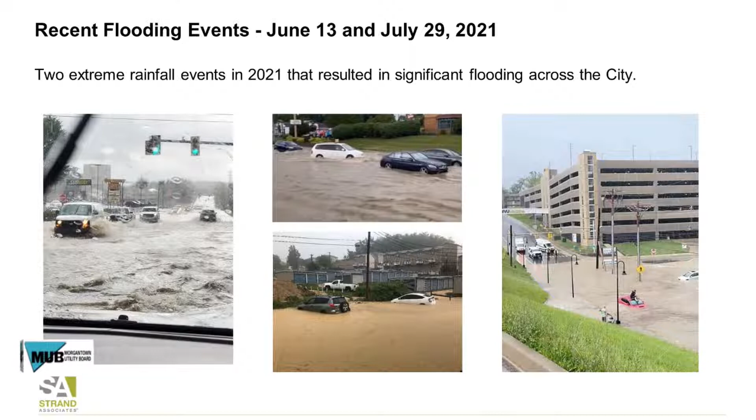So what we thought we would do is arrange our discussion tonight around 4 major steps. First is understanding the rainfall that fell in those 2 events, determine where the flooding occurred, understand the existing stormwater management system that is in place today, and then we wanted to review some of our initial observations of the flooding that occurred.

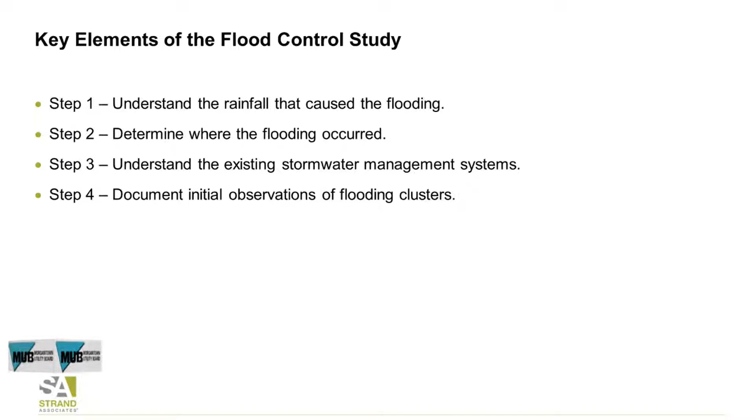And then what we do is we characterize the various rainfalls. So on the June 13th event, the rainfall varied from 0.77 inches to 3.3 inches over an hour. And 3.3 inches of rainfall in 1 hour is very intense rain. So the average for that June 13th event was about 1.9 inches. And we'll get into explaining what that means in a minute.

On to the July 29th event, the gauges ranged from 2.88 to 6.42. 6.42 is extremely intense, extremely unusual. So the average for that second event was 3.9 inches in 1 hour. So what does that mean?

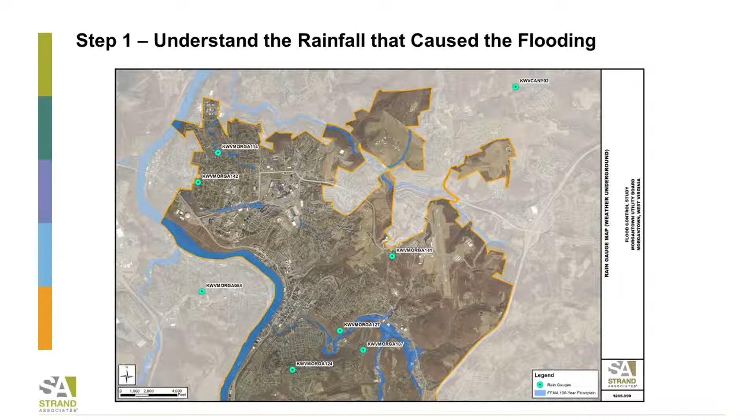And this is sometimes a difficult and challenging concept to convey to people, because as engineers we always use the term 100-year, 50-year, and in this particular case we would be telling you you had two 100-year events within about a month of each other, which doesn't make sense, right?

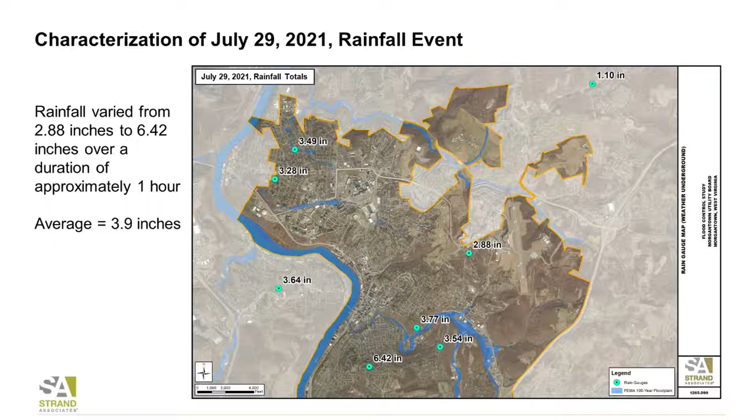So in reality what that means, we characterize rainfall events, we look at 50 years of historical data, as much data as we can find, and we just run statistics on it. And it's really an issue of probability. So the rainfall events that we characterize, when we say a 100-year event, we mean that there's a 1% probability in any given year that that storm can occur. A 50-year event means there's a 2% probability.

Well, with rainfall, this is what we see. We look at all the historical rain that Morgantown has received, and we basically have determined that about a 2.5-inch rainfall event, that's shown in that yellow bar on the graph, anything above that is greater than a 100-year event and has less than a 1% probability of occurring. Both of these events that we have been looking at exceeded that 100-year probability. So we are over in the right side of this spectrum with those two events. And you can see the red text below it.

Now, the other important element of this graphic is you can see this blue horizontal line is between the 10-year and the 25-year event. And that's in essence what the engineering standard for a level of service for storm sewer conveyance systems is, typically about a 10-year to a 25-year storm. Okay, so starting fresh in a community, you're going to put storm sewer systems in to convey runoff. A typical design standard in the United States is somewhere between a 10 and 25-year event. And again, it's kind of community specific, but that's in general terms.

So even with a well-designed storm sewer system that meets industry standards, when you get rain events like you experienced on those 2 dates, those systems are going to be overwhelmed.

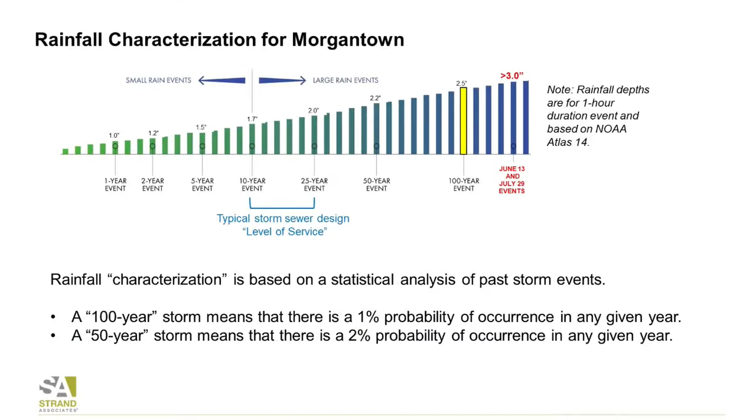The complaints were a little bit more widespread on the July event, but that really shouldn't be a surprise because the gauges showed higher intensity rainfalls in a number of gauges across the community. But again, in both of these events, we do see some gauges, even around the city, outside the city limits, that did show significant variability in the total rainfall that fell. So, the combined complaints, there were 239 documented flooding locations in both those events, 239. And you can see that a lot of them were clustered up in the northwestern portion.

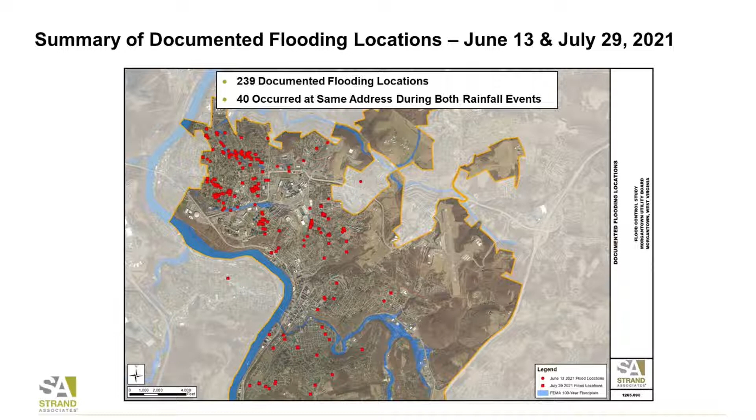So, the first question everyone asks is, why did this happen? What's the probability of it happening, et cetera? So I thought it would just be helpful. Chris and I do a lot of this as part of our jobs. We live and breathe stormwater. It excites us, probably bores you people, but one of the things that we have seen over the last decade is more widespread occurrences of flooding, more intense rainfalls.

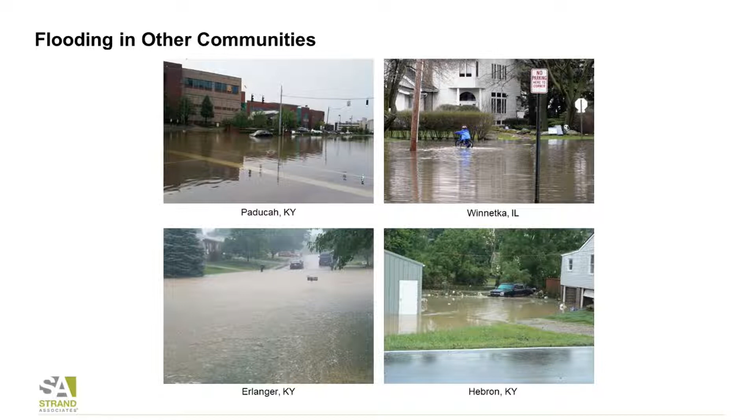And so here's just some examples from some of our clients: Paducah, Kentucky; Winnetka, Illinois; Erlanger, Kentucky, it's where I live; and Hebron, Kentucky. And again, in all of these cases, we were finding situations where these intense cells centered on a particular area of a community overwhelmed the storm sewer system and widespread flooding occurred. That situation in Paducah up on the top left, that's actually around their hospital. So access to the hospital was not available during a couple of these events, which obviously is a dangerous situation.

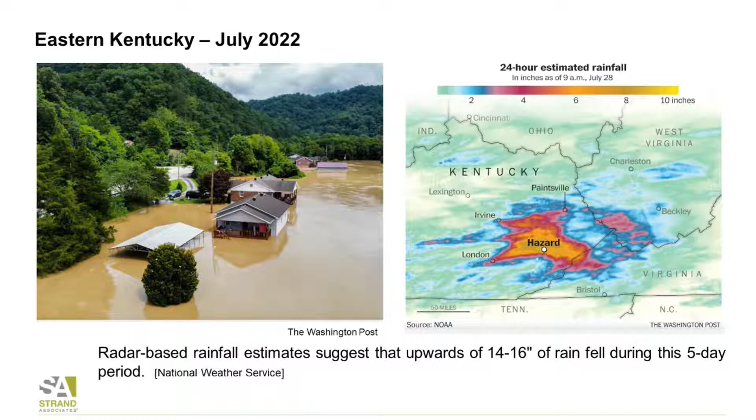Eastern Kentucky, I mean, I think everybody's probably aware of the events that occurred this past year in Eastern Kentucky. And again, I think sometimes it's helpful to put magnitudes in perspective. And you can see from this graphic that some areas got upwards of 14 to 16 inches of rainfall, which is difficult to really get your arms around in terms of that much rain falling on one area in a short period of time. And then this image on the right shows you some of the radar that shows you some of the peak intensities, and also, quite frankly, sort of how limited it is.

These cells seem to come into an area and kind of stall and sit and just dump rain, and bad things happen from there. So that's just a little bit of perspective from around the Midwest from some of our other clients that are experiencing similar situations with flooding. So as we step back and we look at where these complaints occurred, and we look at the type of rainfall that caused these issues, we begin to start trying to figure out, okay, why did this happen?

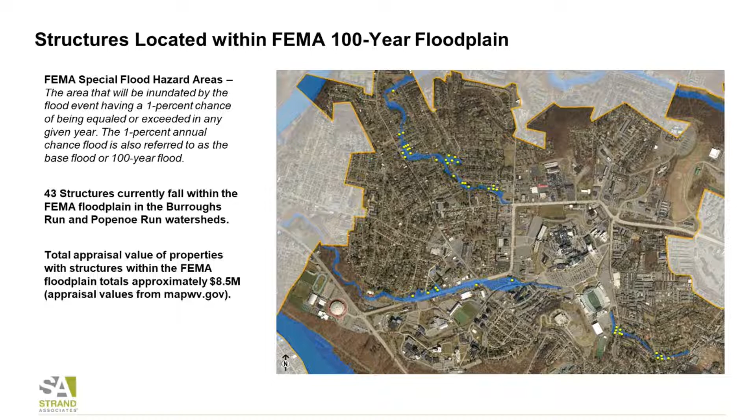So I'm going to turn so I can point. So all these yellow dots represent complaints from those storms from property owners along those floodplains. 43 structures. Just those structures alone, those 43 structures represent approximately $8.5 million in property value in the floodplain. So then we'll zero in a little closer. This is Burroughs Run. This is Popenoe Run. And then this is Popenoe Run upstream from the stadium. There's a culvert under there.

But again, it's important for everyone to recognize that, as stormwater engineers, when we look at floodplains and we look at a 100-year storm, we in essence expect to see those areas flood. So this is going to be one of the challenges moving forward when we begin to look at alternatives for your community, is what do we want to do in these certified floodplain areas? Now, the good news is it may open up some opportunities to bring some federal funding in, but it depends on what solutions are allowable under it.

Oftentimes, FEMA likes to do property purchases. They buy out the properties and remove them from the floodplain to stop recurring structure flooding. So these are some of the tools and some of the opportunities that are out there. But again, every community that is dealing with floodplain issues has to figure out the direction that they want to go.

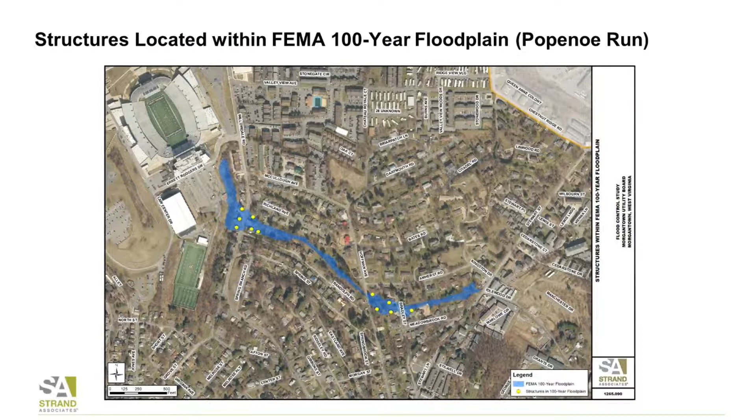So one of the exercises that I did in looking at these particular areas was, if you want to eliminate the water coming to the surface in a floodplain, you've got a couple of options. One is you provide extensive detention above it, so you stop the rain and the runoff from getting to those areas, which is pretty challenging to do depending on topography, et cetera. The other is you convey it. Because in essence, you saw on Patterson Drive, the water was running down Patterson Drive. That's moving through the floodplain. So the other way to deal with it is you convey it.

You convey it underground. And the way you would do that in some of these areas is with extremely large box conduit systems. Picture a big rectangular concrete box buried underground that's big enough to convey these rainfall amounts. So we just completed one of these up in Cincinnati, and so I used the costing values of that. We didn't size this, we just did some real high-level numbers, but I just wanted everyone to sort of understand, when you're looking at trying to solve some of the problems that you have here, what kind of dollars are we talking about? So this is really just to help everyone understand the magnitude of potential solutions.

This is very high level, it's very preliminary, but I used $3,000 a linear foot, because that's basically what the box in Cincinnati cost that I think is big enough to convey these events. So when you look at these values, you see in Burroughs Run, we would probably need about 6,000 linear feet. Popenoe would probably need about 4,000 linear feet.

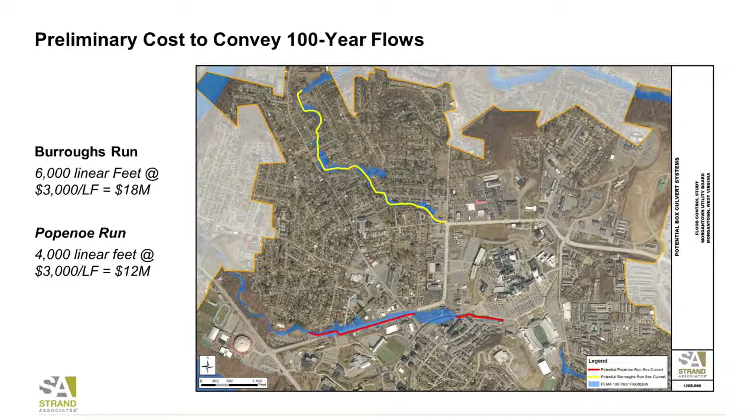So step 3 is understanding the system, and I'm going to turn it over to Chris to provide a little more detail on the next sections.

So any type of catch basin, curb inlet, culvert pipe, storm drain, or outfall — even the roadways themselves, once you get beyond that 10-year, 25-year event John was describing earlier, can sometimes be used for stormwater conveyance to get drainage down to the streams.

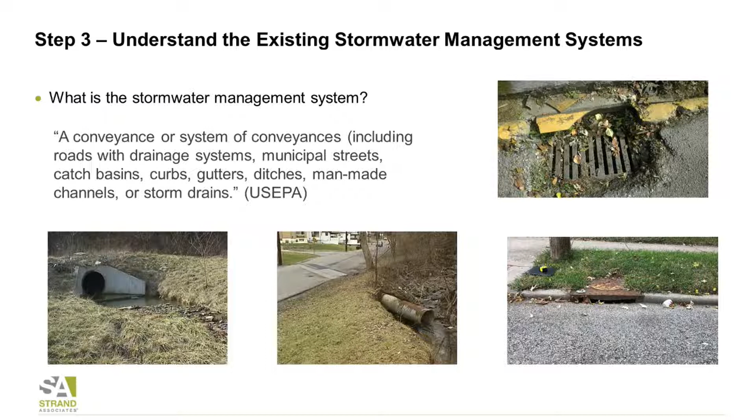This is a very broad, zoomed-out map, but as part of our flood control study we've been provided the stormwater mapping from MUB — all the stormwater conveyance systems, pipes, culverts, catch basins, and manholes — that we have to evaluate to understand, in the locations where flooding occurred, what the stormwater conveyance system looks like: how big it is, what the pipe size or diameter is, what material it's made of, and what the elevations are to drain areas of the city.

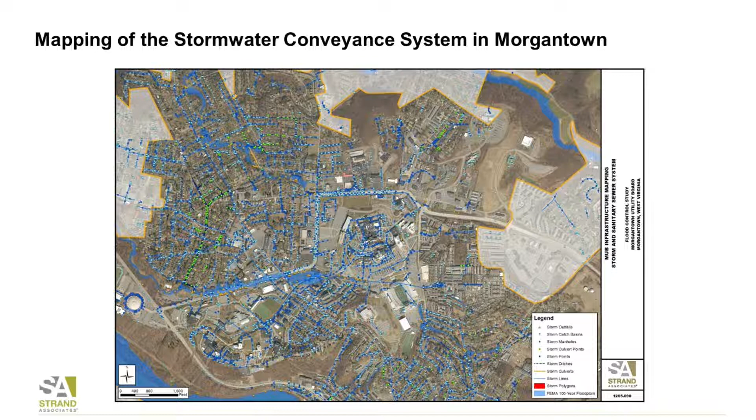So this is a pretty broad view, but we do have some statistics as we evaluate the existing system. Within the MUB stormwater service area, there are over 13,000 individual storm sewer segments conveying stormwater runoff during these rainfall events, equating to about 150 miles of storm sewers and culverts. We're talking about a significant amount of stormwater system throughout the service area, plus over 20 miles of open channels and ditches and approximately 6,000 individual storm structures — any catch basin, manhole, or outfall that's part of the system.

All told, the stormwater boundary that MUB is responsible for, from a stormwater management standpoint, is about 9,000 acres — a very broad area with a significant amount of stormwater conveyance systems helping convey runoff.

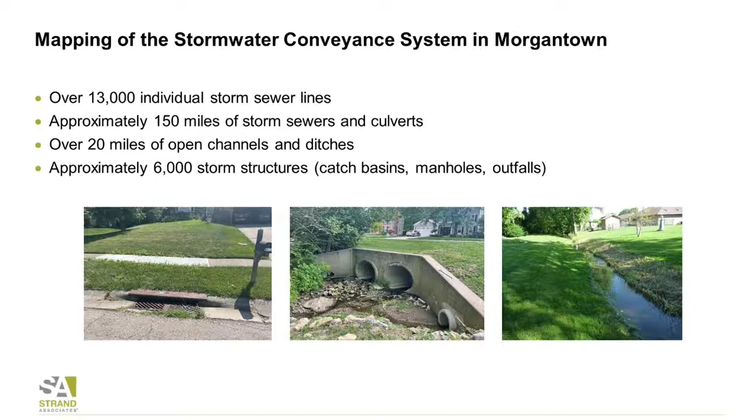One of the things we've started mapping, or reviewing, are existing stormwater detention basins and green infrastructure — stormwater control facilities that help manage runoff during rainfall events. A lot of these systems are around the university, which has implemented good programs for green infrastructure, a bit of a stormwater buzzword, but these features capture stormwater runoff, try to infiltrate as much as possible into the ground, and then slowly release it back into the stormwater conveyance system.

There are a variety of these systems within the Popenoe Run and Burroughs Run watersheds. Unfortunately, some of these systems became overwhelmed during those two events last summer. So they're good in practice, but they're designed to detain only a certain amount of drainage.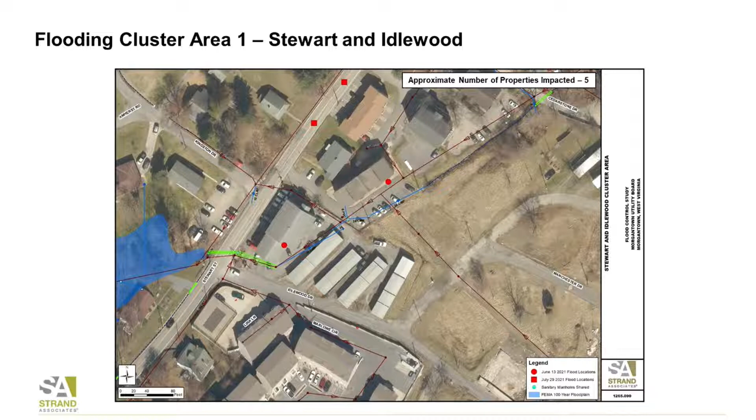During that event, from a scale standpoint it may be a little difficult to see, but we've got these red dots and red squares on the map that designate specific addresses or locations where MUB had documentation of flooding occurring during these particular events. So about 5 properties were impacted in this location.

Another complicating issue on this one: there was an active construction site upstream from this area. When you get a rainfall event beyond a 100-year event, even some of the measures taken on a construction site, like silt fence or sedimentation basins, can become overwhelmed, and that's why the flood waters in this location look pretty murky or dark — because of a lot of the runoff coming from an active construction site.

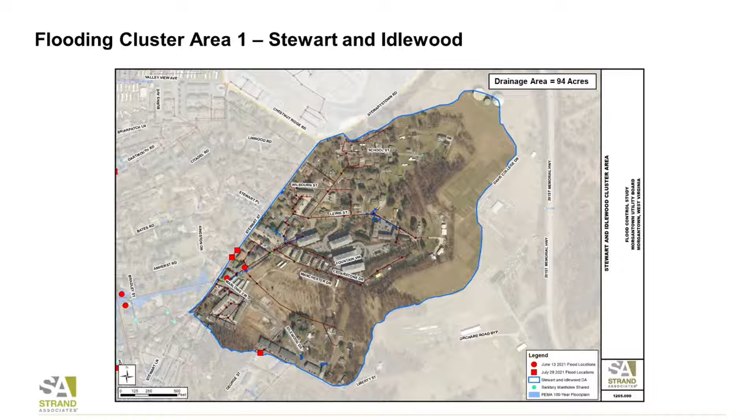Unfortunately, the existing infrastructure in this area, immediately upstream of where the flooding occurred, is pretty small. These images show the existing stormwater conveyance system, the piping network in this particular location. For example, you've got a 24-inch diameter pipe trying to convey runoff from about 90 acres of drainage. From an engineering standpoint, we have general rules of thumb, and this is one of those situations where, in order to convey runoff from 90 acres, you need something a lot larger than a 24-inch diameter pipe — it's just too small of a pipe to be able to convey that much runoff.

Now fortunately, MUB — as was mentioned earlier in the board session, the Popenoe Run stream restoration project — does include some improvements up to this zone to improve some of the conveyance capacity. But these are some of the limitations or issues we've identified initially here that we know we're seeing as a challenge moving forward.

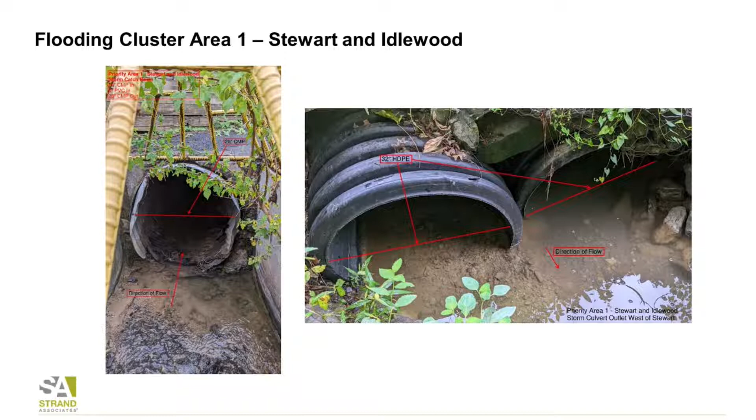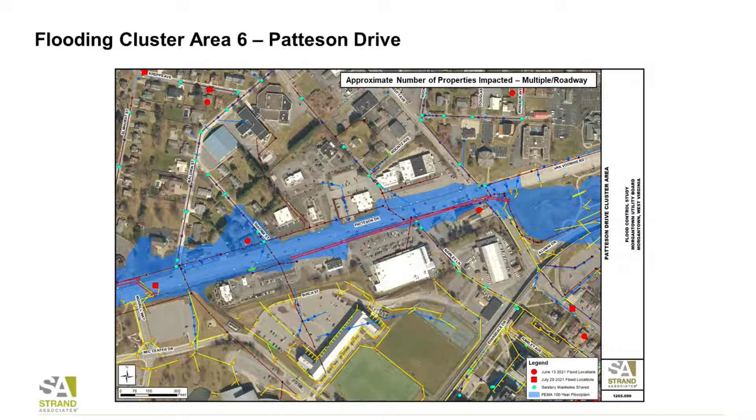So you're trying to get as much runoff into the culvert as possible, but you want it to be as free-flowing as possible. These are things we will identify in the flood control study as corrective issues from a maintenance standpoint to try to improve the capacity of the existing system.

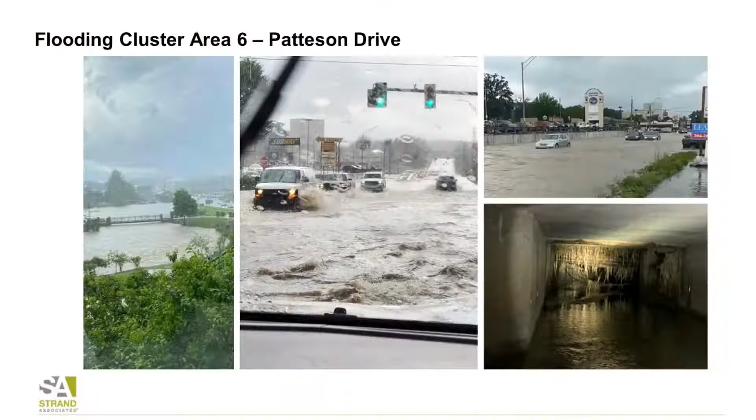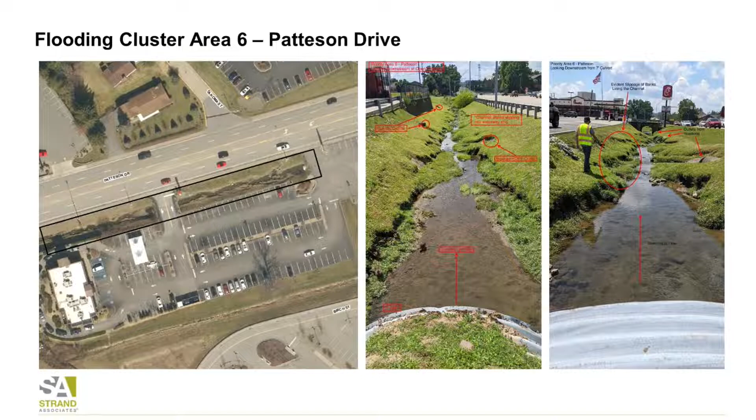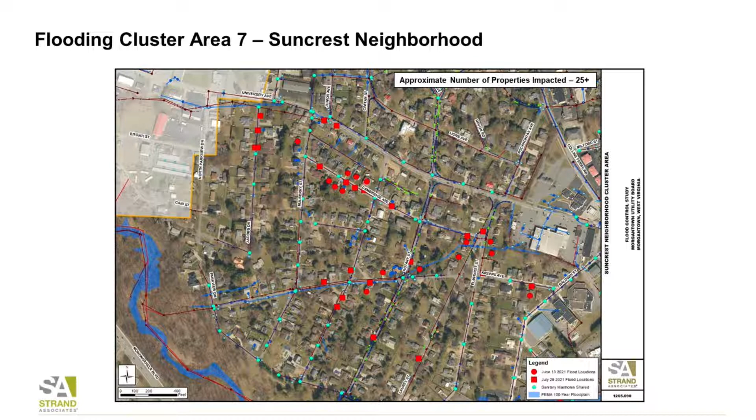Flooding cluster area 7 that we wanted to highlight too is the Suncrest neighborhood. For this particular neighborhood, there were over 25 individual properties or addresses that had some type of drainage issue or flooding issue during these two events from last year, so a pretty significant clustering of houses along some of these residential areas. Here are some pictures of backyard flooding and drainage issues that occurred during those events.

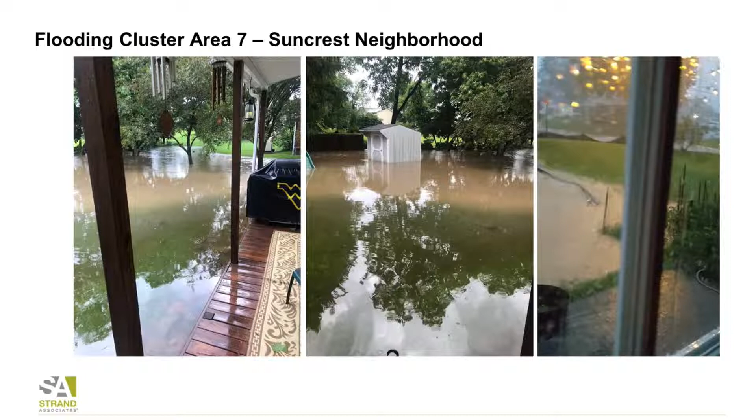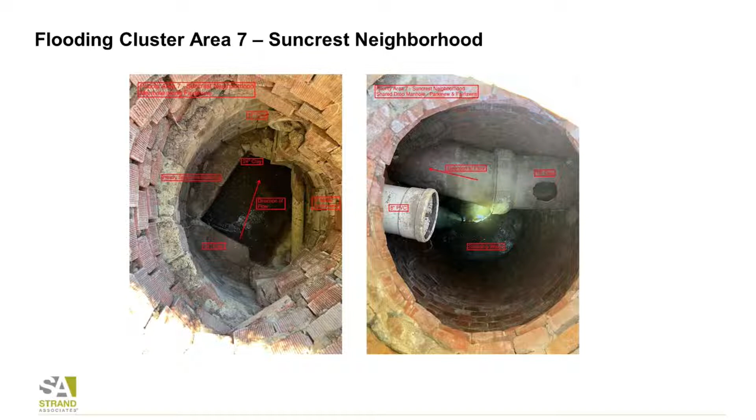So our initial conclusions within the flooding cluster areas: there is potentially undersized stormwater conveyance infrastructure. You've got large drainage areas or watersheds coming into the stormwater conveyance system that may be undersized to convey these larger design storms, along with storm inlets that have limited capacity.

I did show that one picture there where some of the pavement overlays have impacted some of the existing inlets, so it will be important just to reestablish the inlet capacities themselves. There is a very complex system between the storm and sanitary sewers in some of these neighborhoods, where it's not necessarily just a storm sewer issue. It is a little bit of a combination of a storm sewer and sanitary that are kind of acting in

tandem. Maintenance needs of the stormwater conveyance system, again, some of those partial blockages through box culverts or open channel systems that could use a little bit of maintenance to reestablish some conveyance capacity. And then really an overall lack of detention or stormwater storage upstream of the flooding clusters.

There are a lot of developments that have happened over the years prior to there being stormwater regulations in place, where now we've got a lot of impervious surfaces, rooftops, streets, driveways that are just kind of free-flowing into the local stream network without being detained.

And some of that's just a remnant of older development prior to there being stormwater management regulations in place. Now that there are stormwater management regulations in place, any sort of new development or redevelopment project is required to put in detention basins to manage the stormwater runoff from new impervious surfaces.

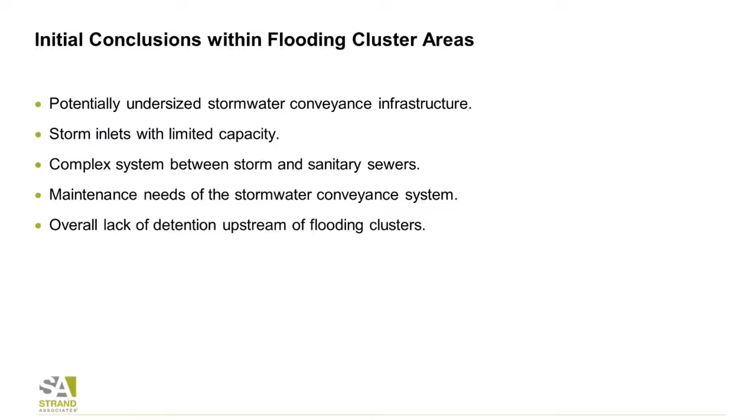So there are activities that MUB has completed following the rainfall events from last year that we did want to highlight. MUB has completed some strategic maintenance improvements throughout Burroughs Run and Popenoe Run. MUB has completed the removal of some of the restrictions within the box culverts. That big box conduit underneath Patteson Drive, some of the conduit has recently been removed from inside the box culvert itself to try to reestablish conveyance capacity.

MUB has proceeded with planning and design of the stream restoration project along Popenoe Run, which was discussed earlier tonight. Collaboration with watershed partners has been ongoing, both with West Virginia University and Department of Highways. Trying to bring these partners together is an important piece of this flood control study, given the complexities of the system, and we're all kind of in this together with different pieces of ownership of the stormwater conveyance system.

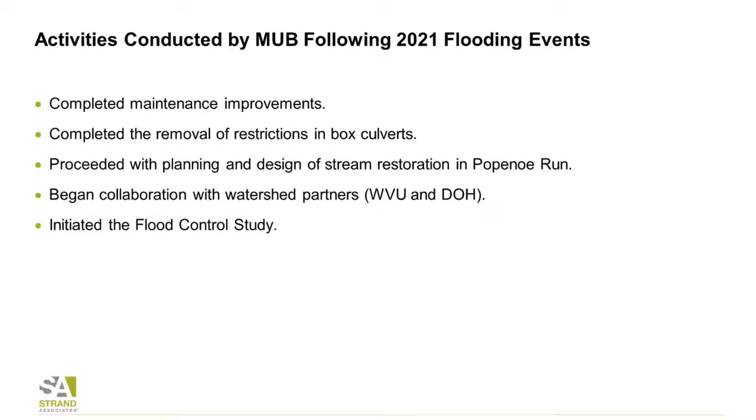And then, of course, MUB has initiated the flood control study, and we're wrapping up the first phase of the flood control study with these initial observations, and then hope to quickly transition into the next phase of the study. So with that, I'm going to turn it back to John to put some closing remarks on our presentation. Thanks, Chris.

So we're almost done. A couple more slides. So the phase one recap and next steps. The two storms evaluated were characterized as greater than 100-year events. We hit on that pretty hard. 239 total complaints were received for those two events. Many of the properties that flooded are located in the FEMA floodplain. That's a significant finding.

Reported flooding was generally limited to the areas that received that real intense rainfall. Again, this is preliminary, but when you look at those rain gauges, you would see a gauge that only recorded 0.7 inches of rain, and there were some of those in those two events. Those neighborhoods didn't seem to experience any problems. It was when we get up to the 2.5, 3-inch events that the complaints seem to be centered around those

particular locations. So the preliminary assessment of that is, for the smaller intensity rains, the system seemed to be conveying the flow reasonably well, at least enough not to generate a complaint. Needs further evaluation, but that's a preliminary assessment. In a 100-year storm, okay, so that's generally performance.

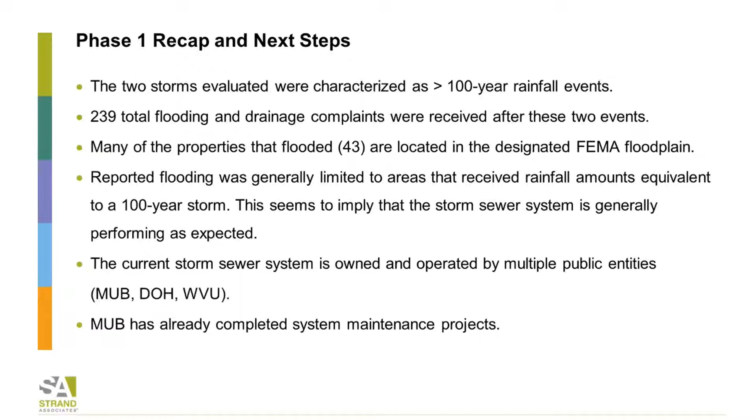The current storm sewer system is owned and operated by multiple public entities, right? It creates a challenge. Who owns what, who's responsible for what? Collaboration is going to be key to anything moving forward. And MUB has already completed a number of maintenance projects.

Now, this is something I want to take a second to explain, because as we transition to the second phase of the study, engineers will be looking at alternatives, in terms of what size pipes do we want to put in, how much detention do we need, where do we need stormwater management practices, et cetera. And one of the key items that's going to need to be resolved at some point is what we call level of service. So this particular graphic shows you a rain event in the top, and you can see the blue shows you where the water from the runoff is.

In the upper picture, it's right up against a home. It's come out of the storm sewer system in the street, it's flooded the street, and it's up against the home. That small circle below the tree is intended to represent the existing storm sewer system, presumably designed to convey about a 10-year event. So when you look at flood mitigation projects, you begin to ask yourself, well, what size storm do we want our infrastructure to convey?

And that's called your level of service. So if, let's say for a 100-year event, we don't want any water up out of the street. We want it limited to the street and the stormwater conveyance system. Obviously, we're going to need a bigger pipe. And so the circle there below the tree in the second picture shows a bigger pipe necessary to convey the same amount of runoff as the top event. The challenge is what? Bigger pipe costs more money. So that becomes the challenge.

And I'll use one quick analogy that I like to use. I think of a stormwater conveyance system as similar to roadways, our road network. So this Saturday, there's going to be a big football game in town. I imagine it's going to be pretty difficult traveling through downtown on your existing road network. So your level of service Saturday for your road network is going to be horrible. In transportation worlds, it's a level of service E or F.

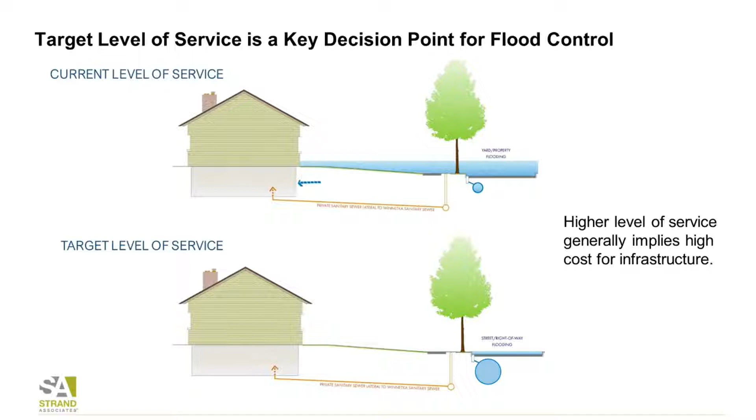So now you say to yourself as a community, will we live with that 6 times a year? Or do we want to build a road network that can convey that Saturday football traffic? The answer is generally you live with that inconvenience because you don't want to pay for a network that is rarely going to be used. That's the same challenge we're going to have with the stormwater conveyance system. We're going to have to figure out that balance of cost and benefit. And that's what we'll be doing as we advance alternatives moving forward.

So, next steps. Discussions are ongoing regarding implementation of Phase 2 of the flood control study. One of the key items is going to be to review and potentially revise the level of service. We need to collect and compile needed data of the existing storm sewer system. We've got a lot of it, but there are some data gaps. Identify projects to improve the stormwater management system.

And we typically tackle this in steps where you look for some low-hanging fruit. Are there systems that just need cleaning? Are there facilities that are underutilized that we can retrofit very cost-effectively? We want to get the existing system functioning as well as possible before we start investing in new infrastructure. And that's just a good use of public dollars.

One of the topics that will be explored is removal of properties in the floodplain. What does that do in terms of bringing the potential for federal dollars? There may be a local match, but it hopefully would not be all locally funded. So all those types of options will be explored moving forward. Evaluate large conveyance systems, and then how big is big enough.

And then community input is going to be very important. Engineers can pretty much design anything, right? But every community is different. Every community has different priorities. Do you want to purchase properties in the floodplain and take them down or not? Do we want to go after federal funding or not? Do we want big, large regional detention facilities? Do we want large conveyance systems? That's got to come from the community. Estimated engineering cost for Phase 2 is about $300,000.

And I'm going to wrap up the presentation with this final thought. When we talk about flood mitigation, it's really important to understand the distinction between flood mitigation and flood elimination. I always get concerned when I do these types of projects that everyone's expectations align with what we can really achieve. And we cannot eliminate flooding. There's always going to be a rain event that overwhelms whatever we design. So as we move forward, this becomes an exercise in flood mitigation and trying to provide an appropriate level of service to your community.

And with that, we can open it up for questions.

Yes, sir. Going back to the very beginning, where you identified the rain gauges, do we have sufficient number of rain gauges, and are they in the right location?

Do you want to handle it? Oh, okay. I can repeat. Can I do this? Is that all right?

The question was, do we currently have a sufficient number of rain gauges, and are they in the right locations? I think the short answer to that is we would benefit from having more publicly owned, maintained, and managed rain gauges. Some of the rain gauges that generate publicly available data are in people's backyards, and they just commit to sharing their data. So we really aren't 100% sure of the quality of those.

So we've already had conversations with MUB about increasing the network and putting them in a more uniform distribution across the community, and then having sort of dedicated staff maintain those. Yes, sir.

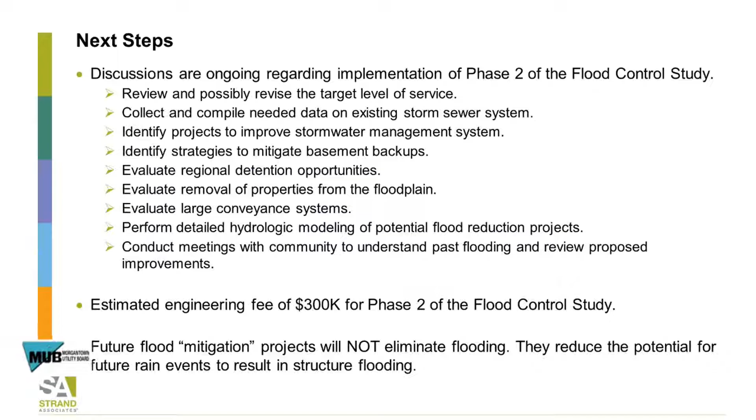Along those same lines, and it was tough for us to see on the slides, where those rainfall amounts were on those gauges. Were the heavier rains both times clustered in the same spots, or did we see variation in those highest concentrations of rainfall? And I apologize, these look good when you're looking at it. Oh yeah, they're great on the large format, absolutely.

Yeah, can you get me there, please? It was pretty varied is the short answer, and I will walk you through the amounts. I just gotta get closer so I can see them. So in this particular event, this gauge is reading 3.3. This is 1.93, 2.56, 1.2 inches, 0.77 inches, 1.69.

So it was 2.5 here. These, the 1.6 is pretty big, but these two aren't too bad. And then up here we have 3.3 and just about 2 inches. So you would expect something in this area to show where your complaints were, Chris, and keep walking me through that if you would.

Then in July, we had 3.49, 3.28, 2.88, 6.42 down here. Now that may be an outlier, and that gets to the issue of, it'd be good to have that as a publicly managed rain gauge, but we had 6.4 and 3.5 and 3.77 down here in that particular event.

Well, and honestly, that makes me feel a little bit better at the fact that in that second rainfall event, this area, it bode worse, obviously, than the first rainfall event, but it was not the highest concentration, because even if that 6.42 is an outlier, you got the 3.77 and the 3.54 down there, and I believe the complaints were nearly what we had up in this area. Down the road, I know we very much need to focus on these two areas that we've talked about up here.

My concern is that's because the rain fell here last year. Where else could there be issues with concentrated rains? That's right. In the near future? That's a great point, and again, that speaks to level of service community-wide, because the rain will never follow the same pattern in multiple events.

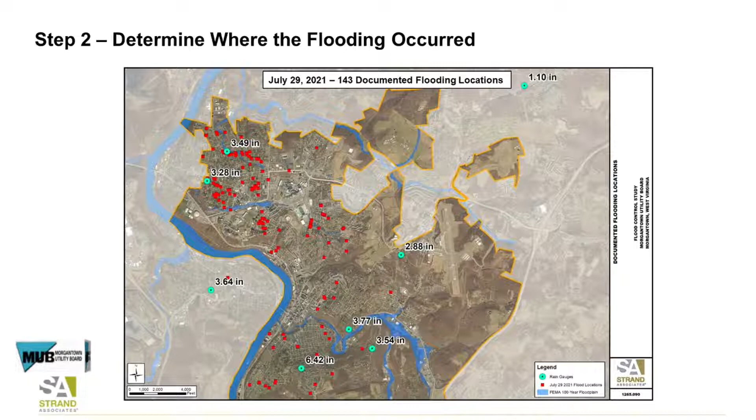A follow-up on my first question and a little bit of his. If we were to install more MUB-oriented and maintained rain gauges, can you have at the same time telemetry that would tie into MUB central office in the event that we saw some abnormally heavy rainfall, that we could put alerts out through our various media that we have? Is that technology available? It actually is.

There's a couple of companies out there right now that, for large regional basins, will connect to weather radar in real time, and they can adjust the operation of the gates in the basin based on the projected rainfall and the projected runoff. In this case, what we would be doing, quite honestly, probably would be just predicting the rainfall, looking at weather radar, probably no different than and probably a little bit behind what the news stations are doing,

but you could certainly, if there were a network of people that wanted a text message or something, somehow link that to all of that. So the technology is there, it's just who do you notify, at what point do you notify them? The information would be basically connected to the radar that the weather stations are using. Anything you want to add to that?

Yeah, so to further John's point there, some of the other communities that we've worked in do have, in some circumstances, like 24 rain gauges across their service area. Some of those communities make that information available in a public domain where anyone can get on the website and look at the rainfall data in real time.

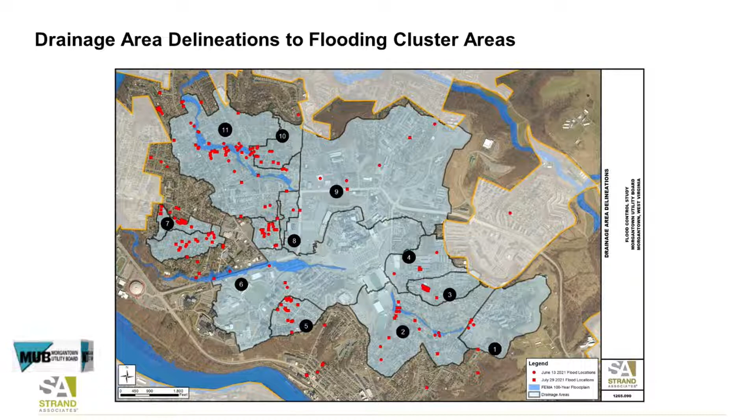Yeah, so that was a good question, and that is true. The next phase is where we would really get into that. The first phase was honestly kind of a high-level understanding of what are we dealing with here, where did the flooding occur. In the next phase, we would start to identify specific improvement projects or alternatives to try to alleviate the flooding, including cost estimates for some of those projects. This was honestly kind of our first attempt at putting some boundaries around these clusters.

There are other locations outside of these clusters that may not have been quite as concentrated, but could have been just as bad, kind of mini clusters, so to speak. So there are some additional discussions that still probably need to be had in terms of whether there are other locations throughout the service area that may warrant additional focus beyond this first list of clusters.

That's where we'd get into the detailed modeling that John was talking about earlier, where we could really show, if you look at alternative one, this improvement project, how much the flooding would be reduced as a result of implementing that project, using the two-dimensional stormwater modeling work that we do.

Will you guys capture information about those individuals or organizations currently paying for FEMA insurance? Is that publicly available so you can use that as part of the benefit cost analysis? I'm not sure if that's publicly available, who's paying insurance and who doesn't, because it really depends on their lender.

But the benefit cost analysis is still a viable option we use when we talk about structure flooding and recurrence of structure flooding, repeat flooding. So even without that information, when we start simulating various control alternatives and running the models, we'll say this many structures flood under this scenario, and the cost of that alternative is that. You begin to hone in on where your greatest return on investment is.